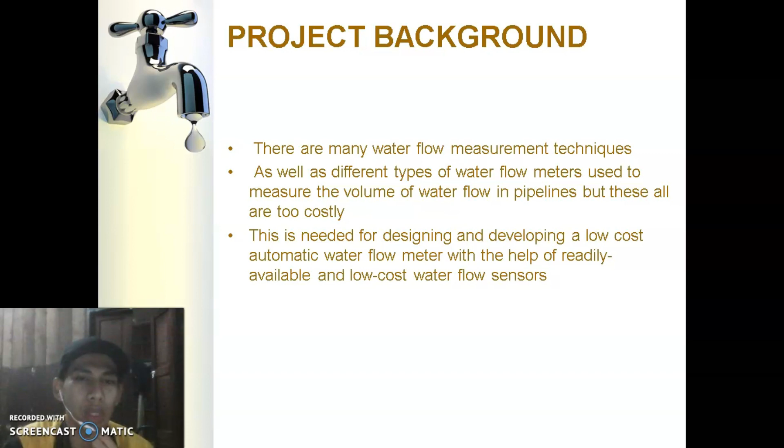For the problem statement, measurement taken manually by individuals or failure to take the reading can have drastic effect on the result. Such manual system requires extra workforce.

The person cannot know the flow and water quality while he was not in the place of deployment, so for online monitoring the person only needs a computer system. Therefore, in the Internet of Things IoT era, wireless real-time internet technology is the best solution.

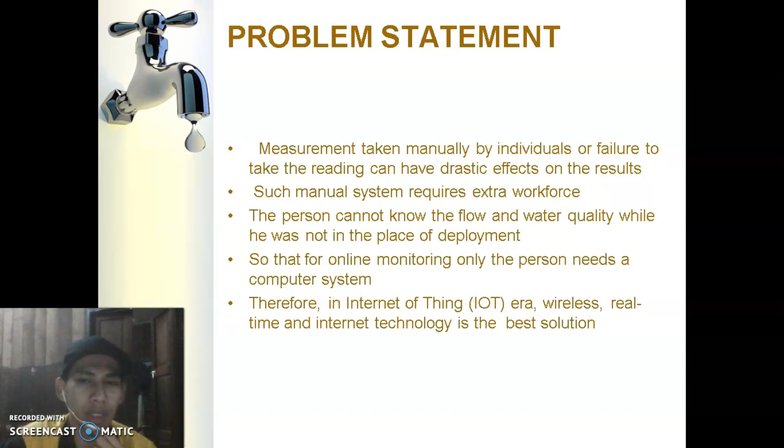So the objectives are: to design an IoT system for monitoring water flow and water quality of water. Second, to fabricate an IoT system for water flow and water quality monitoring. Lastly, to evaluate the performance of an IoT system for water flow and water quality management system in terms of water flow rate and total volume.

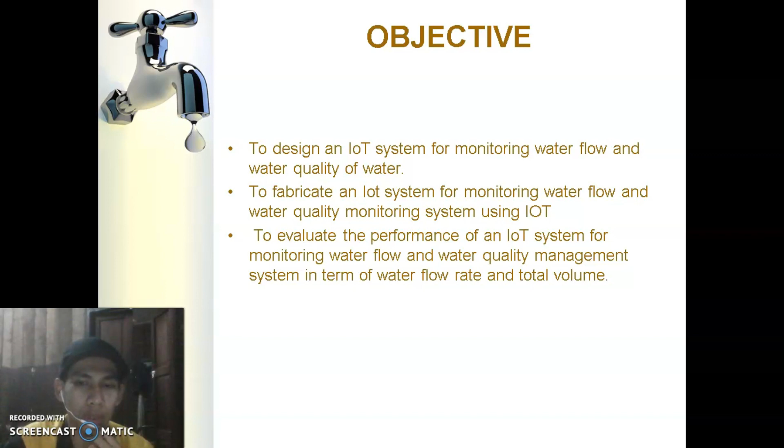For the scope of study, the system for monitoring water flow and water quality based on IoT using microcontroller ESP8266 will be designed. Parameters such as water flow, temperature, and pH of water will be connected to the NodeMCU ESP8266 board. Water flow sensor is used to detect flow rate of water, temperature sensor to detect temperature, and pH sensor to detect pH of water.

The pipe where the system will install has 16 mm diameter where all parameters will be detected. The hardware will integrate with an IoT server which is the Blynk app. All the parameters will be uploaded to the Blynk server and can be viewed or monitored from any part of the world.

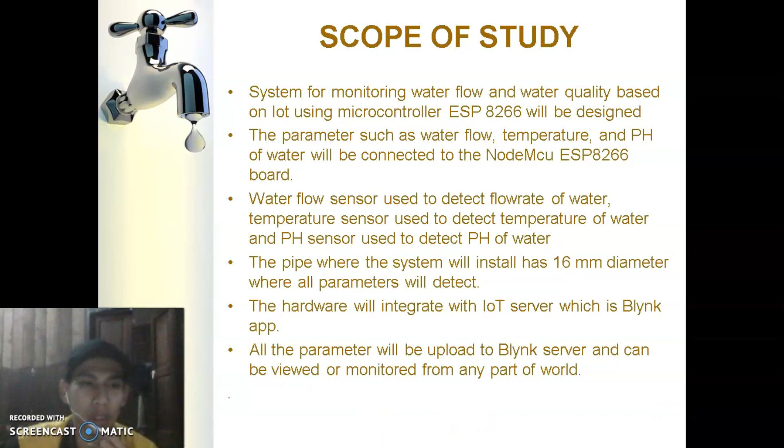Okay, so chapter 2 is about the literature review. This is the sensor that we use for this project.

First is water flow sensor to detect the water flow. pH sensor to detect the pH of the water. And temperature sensor is used to detect temperature of the water.

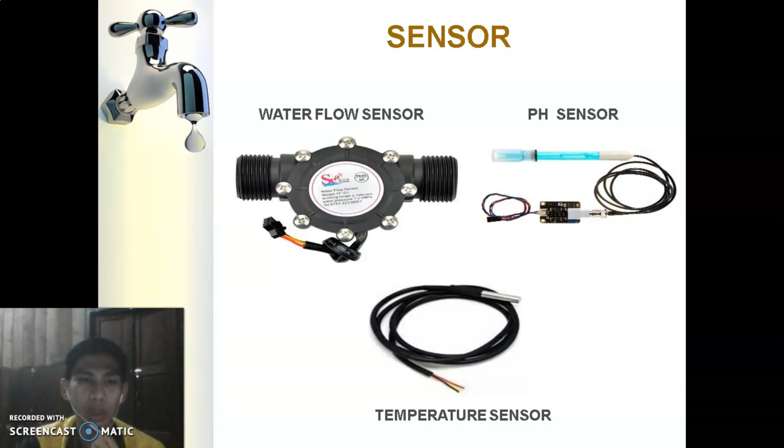Next is the previous research. The first research is IoT-based smart water quality monitoring and flow control system. This project system has a controller that is interfaced with turbidity sensor, pH sensor, LCD, temperature sensor, conductivity sensor, water level sensor, and Wi-Fi module.

The second research is water flow sensor IoT node for Wi-Fi equipped apartments and gated communities. This paper explains the goal is achieved in three stages: calibration of flow sensor, design of robust IoT node with embedded power management, and packaging of the complete system.

Third is smart water management system using the microcontroller ZR16S08 IoT solution. This paper presents a smart water management system using the microcontroller ZR16S08 IoT solution for water distribution support and losses prevention.

Fourth is a low-cost system for real-time water quality monitoring and controlling using IoT.

Lastly, the research is IoT-based flow control using Raspberry Pi. This project IoT-based system is developed to manage the water distribution on a large campus. Depending on the level of the water, the submersible pump starts and stops automatically.

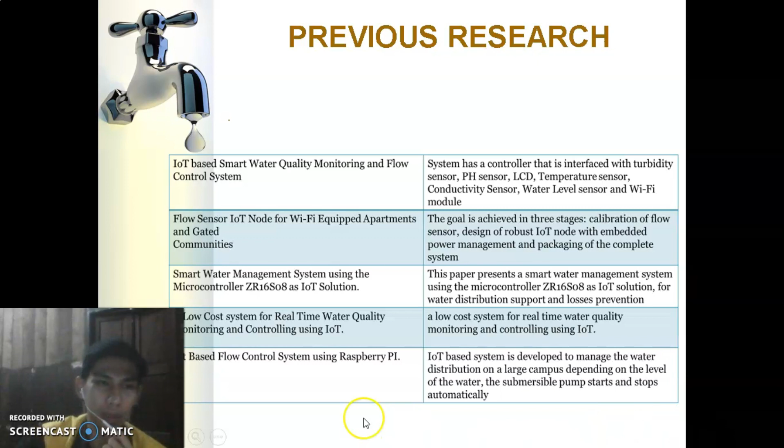Okay, so chapter 3 is the methodology. This is the overall flow of my project.

It starts with the literature review. Then it goes to the software: first, we need to troubleshoot the coding, then make the testing. If this has error, I should check the coding again. If there is no error, it goes to the code embedding.

For the second part is the hardware. I need to make the hardware construction and do the testing. If there is an error for the hardware, I need to recheck again. And if there is no error, it will go to the code embedding and I will make the hardware testing.

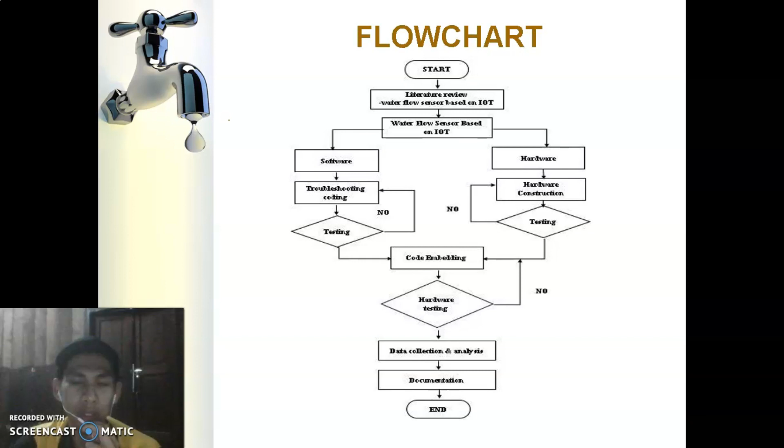If there is an error, I will check the code embedding, and if there is no error, the project will go to the data collection and analysis. Lastly, it goes to the documentation and finishes.

So the final chapter is chapter 4, which is preliminary result. This is the program code. The Arduino software IDE will be used for program code.

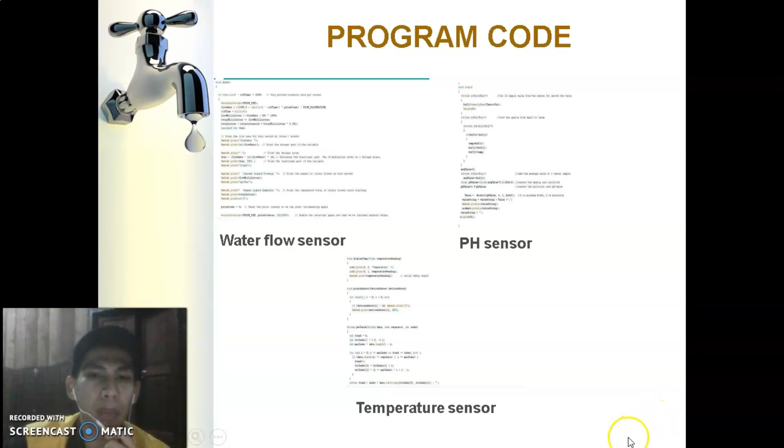This is the coding for the water flow sensor. This is for pH sensor, and this is for temperature sensor. This coding will be uploaded and compiled to the hardware.